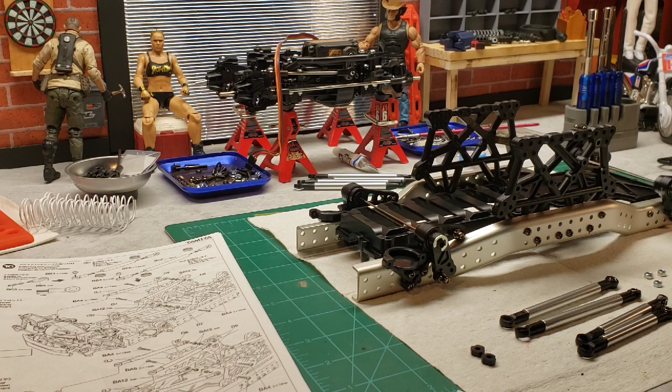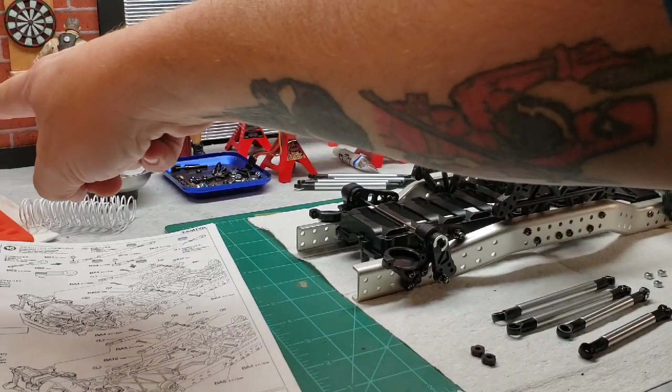I've gone ahead and assembled the arms for the next step, cutting some of it out since it's already been such a long build. We're starting off with step 16, attaching the axle to the chassis. I've also already built the shocks - most people already know how to build shocks, so that's another thing we can get out of the way.

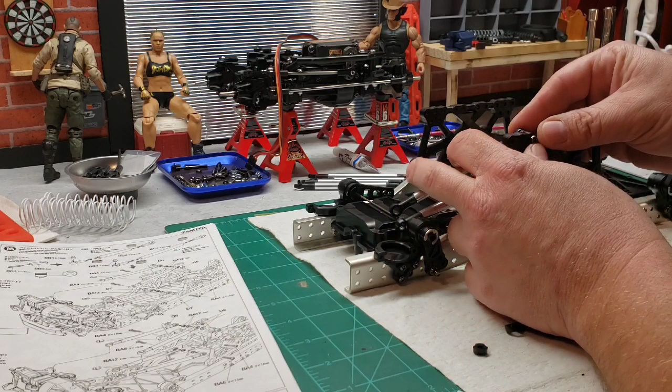We're going to start off with the short arms, which go through this hole right here, with a spacer and a lock nut. Then the long arms go down up here in this hole, and they get a spacer too. There we go, same on the other side.

Finally starting to get to the point of the build where it's going to start looking like a truck.

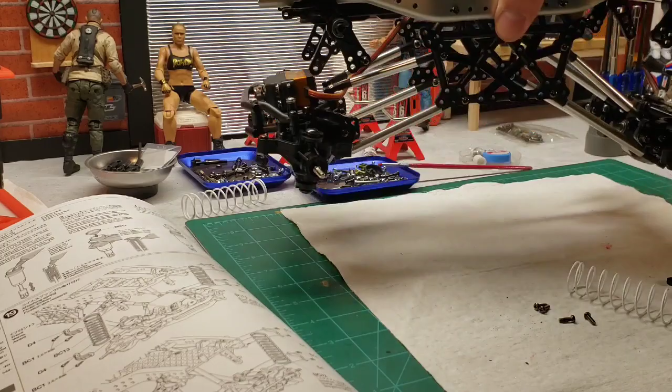Now we're starting to get somewhere - that is something else, all right. I'll go ahead and put the back together and we'll go from there. All right, I've completed that phase - we have the front and rear 4 links and axle set up.

Next is to start putting on the springs. It takes the blue hard springs for the front and the yellow softer, medium springs for the rear. I double checked this over and over because the way these springs line up is kind of strange - they've got quite a bend to them. But I went back over the steps, and everything's most certainly in the right screw hole, so all I can guess is that's the way it's supposed to be set up. We'll get these retainers around them.

We push the springs back in and hold them in place, and it just takes 2 screws. Hopefully my thumb's not blocking it too much on you - just didn't want that to go shooting out.

It's kind of an odd setup. If you have a rock crawler, you know what I'm talking about - this is a very strange setup. Normally you just have your shocks with springs on them, where this actually has this odd cantilever system that the shocks mount to, and then the spring system that runs independently from that.

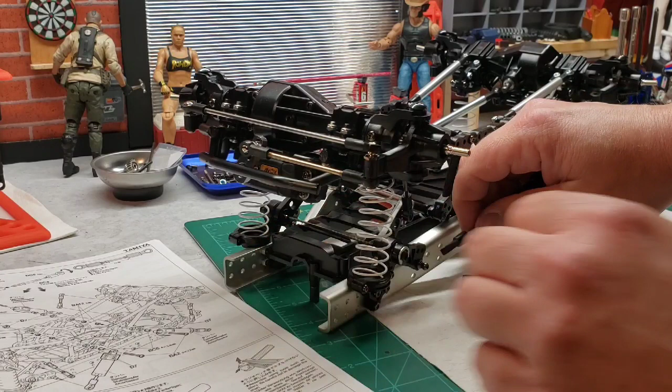Then you have to put one of these retainers in the back, screw through 2 spacers, and it is showing it on the front going to this spot. Then you got to try to get a lock nut in the back, and it's a pretty tight fit back there. Get it started, there we go.

And there it is. Now if that is not the strangest daggone suspension setup on a crawler that I have seen. But it appears that it does work, so I'm going to go ahead and get the rest of it put together, and we'll get back with you on that.

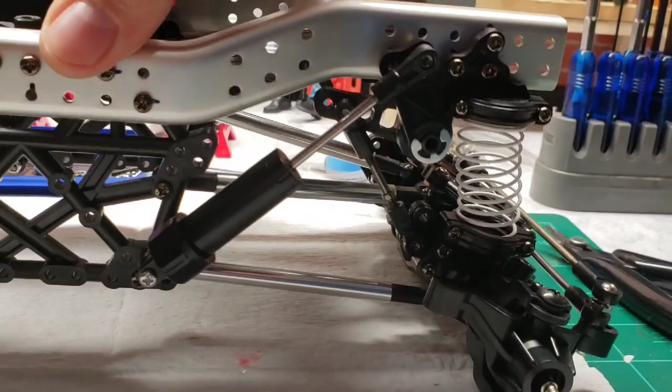Alright, we got the crazy suspension done. Look at that stuff work. That is a piece of engineering marvel right there - I've never seen a suspension quite like that.

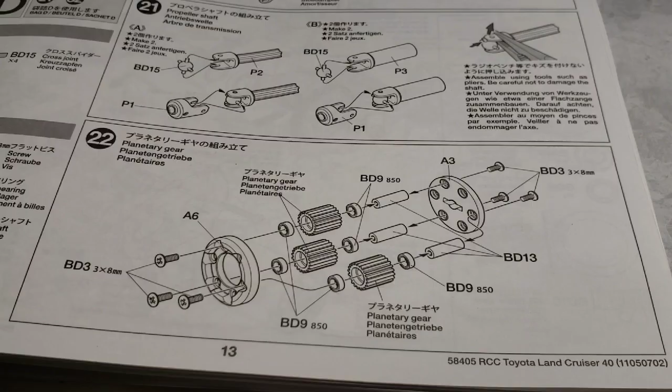But alright, now that we have that completed, we'll move on to the next step - starting to get the gearbox and drive shafts together. Let me get set up and we'll move on to that.

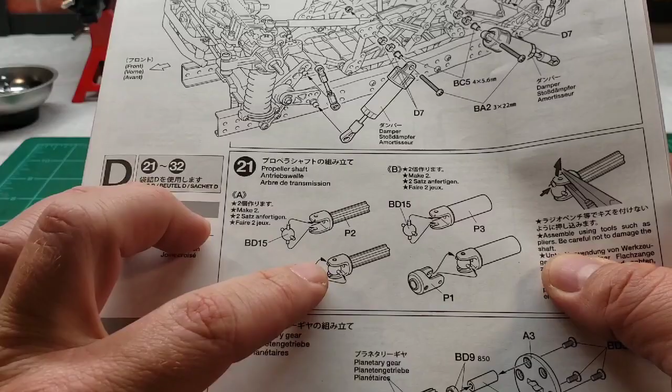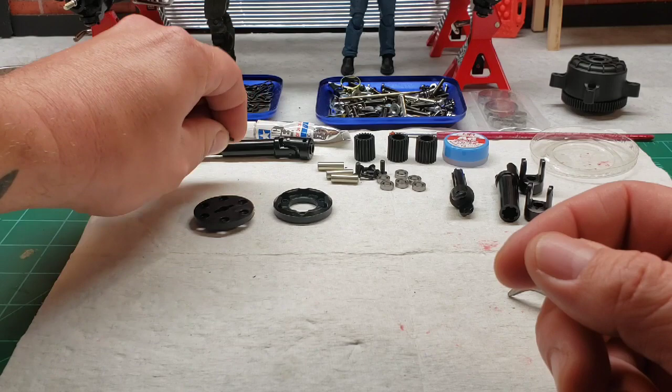Alright, so on to part 21 is putting together the drive shaft universals. This is a part that I'll probably be upgrading in the future - I don't really like how these plastic ones go together.

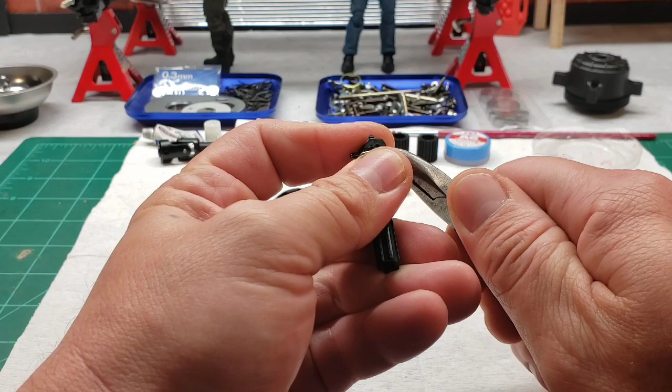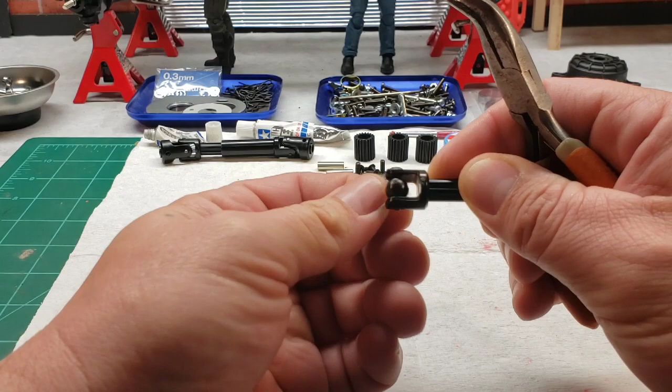Just, I don't know, it feels like a fail point to me. You have to kind of shove them down in there and then use a pair of pliers and bend this tab up to get them to pop into place. That just seems like a part that could easily come back apart under a lot of stress, in my opinion. But we're going to put them together and use them for now. I know they have the full metal ones available.

Yeah, there are some tricky little things. The hard part's getting the one side started. Push down there as best you can.

All right, there you go on that. I'll go ahead and assemble the other side of this. When it's all together, here's what they end up looking like.

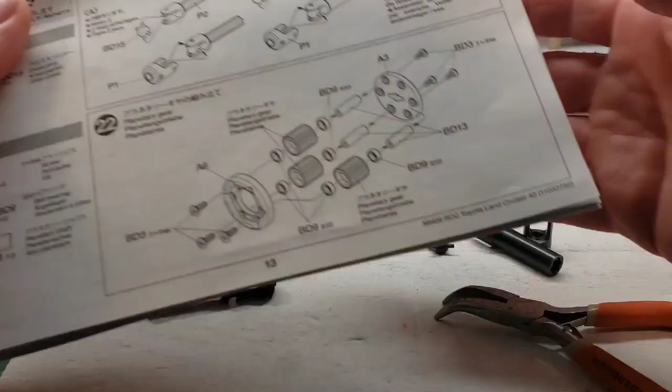Now we'll be moving on to step 22, the planetary gears. All right, it's time to start assembling this, the planetary gear section.

Now it has these screws going into these little aluminum lugs, and it doesn't tell you to thread lock them in the instructions, but I just feel a little bit better if it has some on it. This is a part I don't want coming apart.

When you look at it, they start off with you set in this direction, and first one goes in right here. Now I'm gonna get the screw through there first.

Yeah, I definitely feel better having a little bit of thread lock on there, especially with it being inside the gearbox. You don't want to open that up if one of these little screws comes out. That's just not a good time.

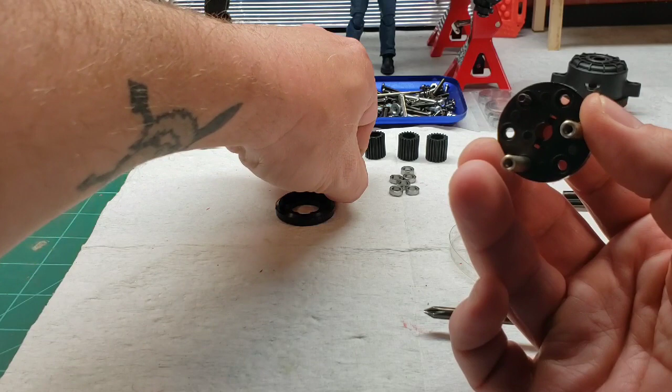All right, then these little bearings that pop in your planetary gears, they should just slide right over.

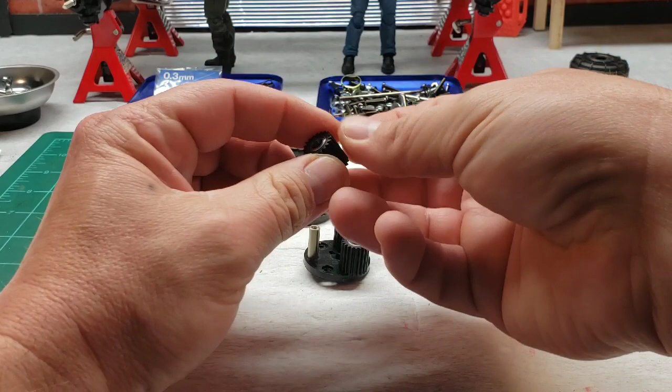And this should just line right up and sit over top of them.

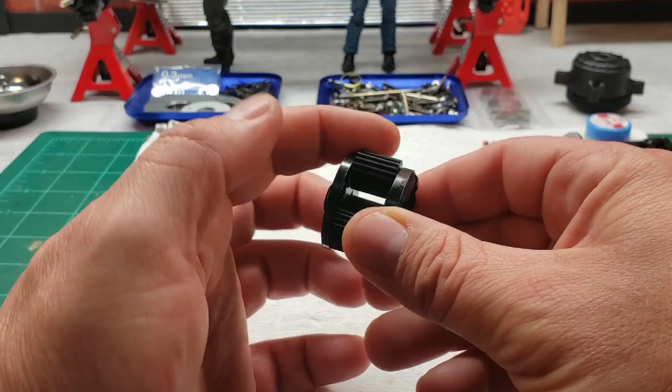Okay, well there we have it. Oops.

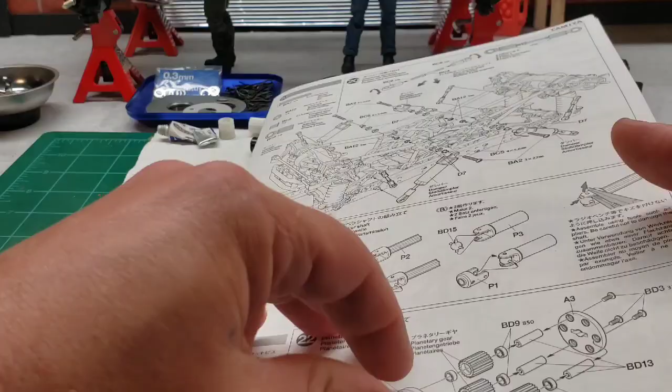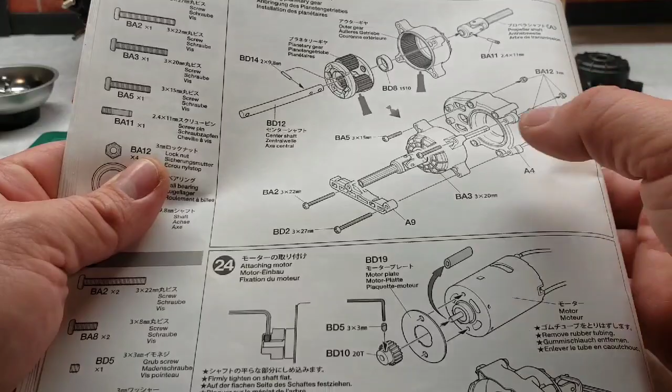Now, to move on to step 23, that's actually placing the planetary gears inside of the housing and start getting the actual differential and everything set up inside there. So let me get these parts out and set up and we'll move on to that.

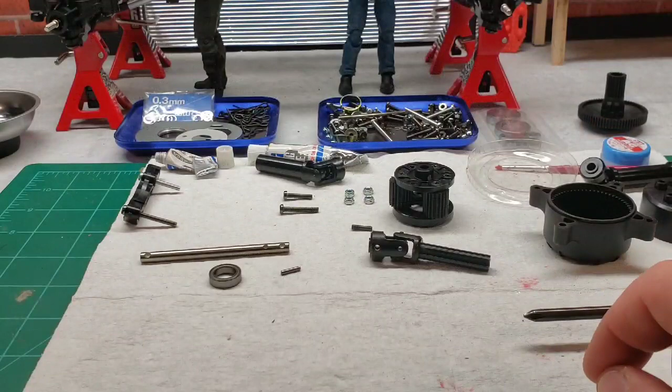Alright, I've stared at it for a second. I think I got a decent grasp of what's going on. I need to get these all greased up.

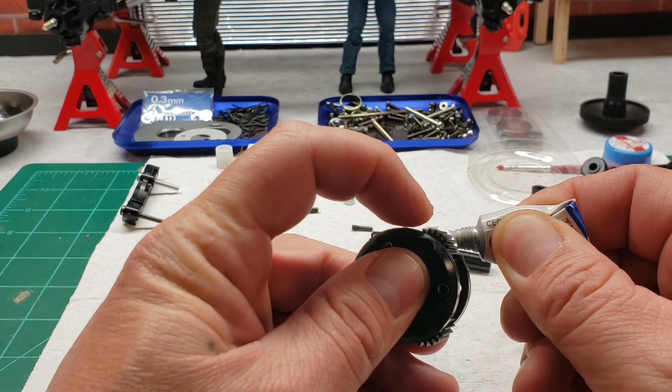I have to open up the next tube of grease here soon. This is one left over from another build, I figured I'd use up first.

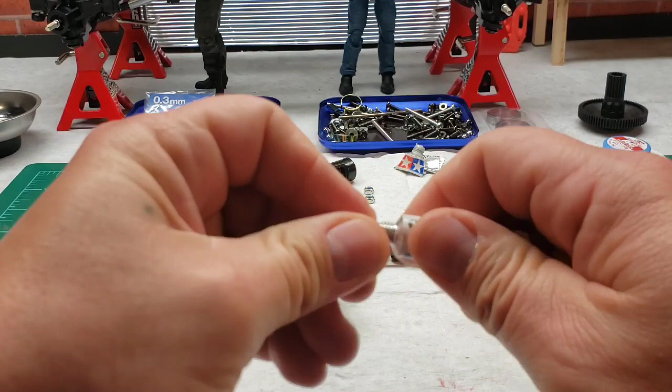Okay, now I need to take and grease this, set my little pin through there.

And that should set right down in there and seat. Good, it did.

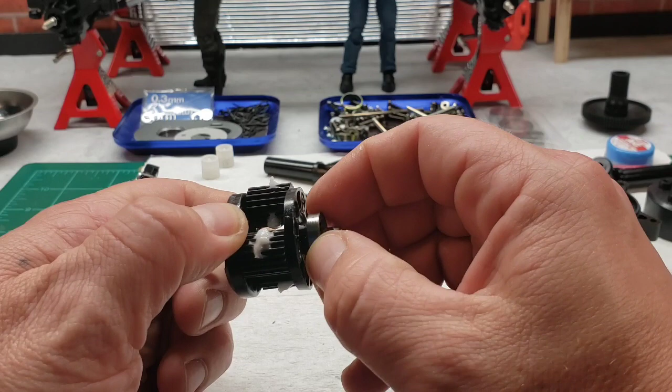And a bearing goes over here. That seats down in there nicely.

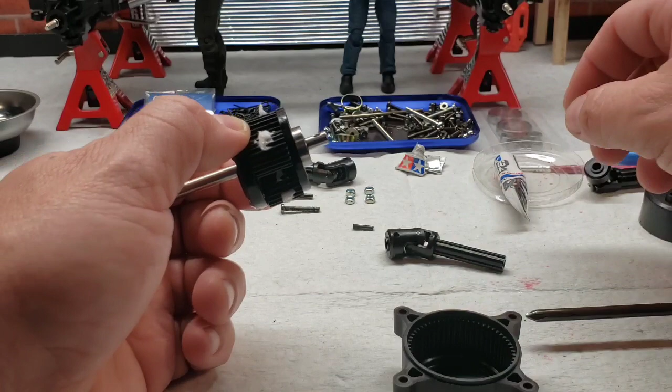I'm going to put a little extra grease around the inside of this before I install the ring gear, the pinion ring gear down in there, or planetaries, I guess.

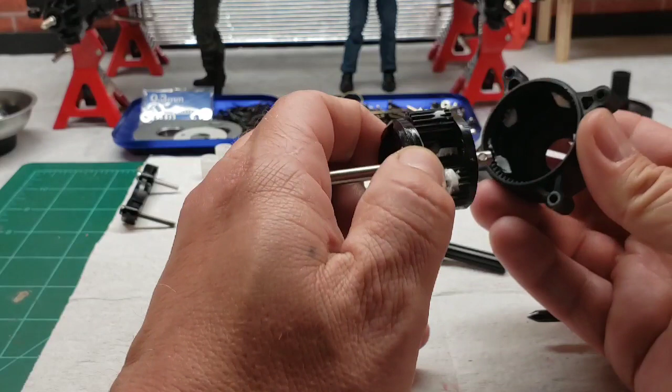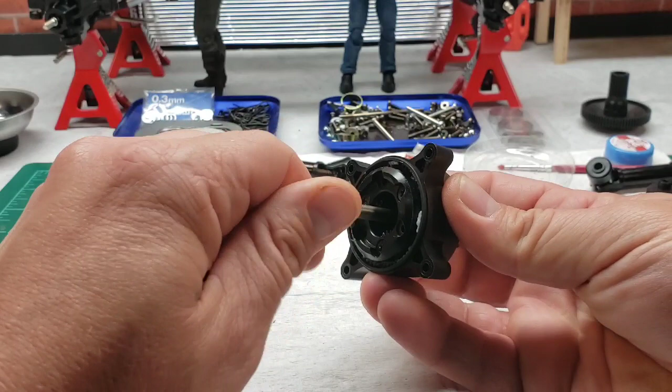That should slide through there, seat this way. Spins nice and smooth. And then should line up.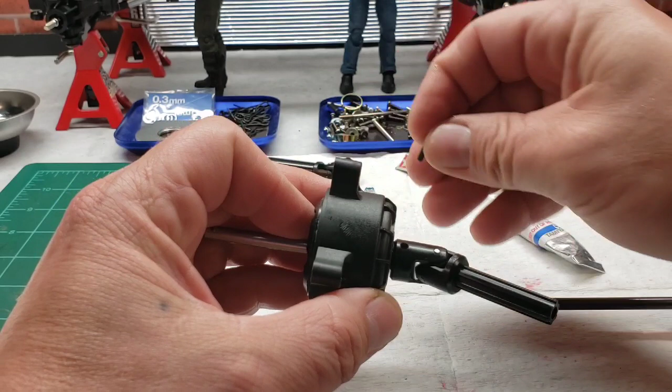A little pin that sits in there. That should decently lock everything into place. Pretty good.

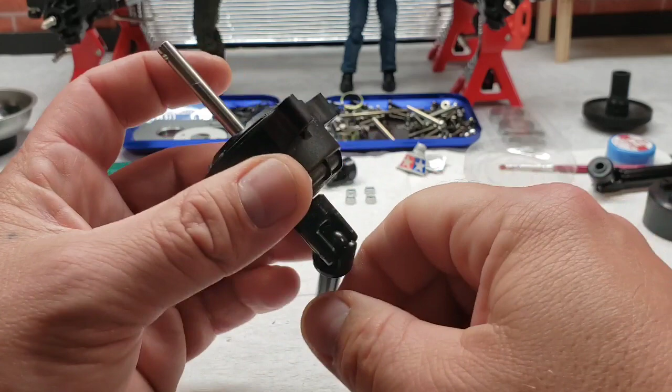After you've completed that, you have to get this to set in here. Spin it till it fits in.

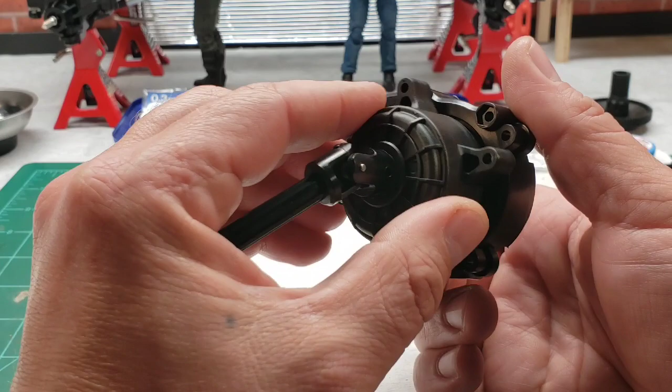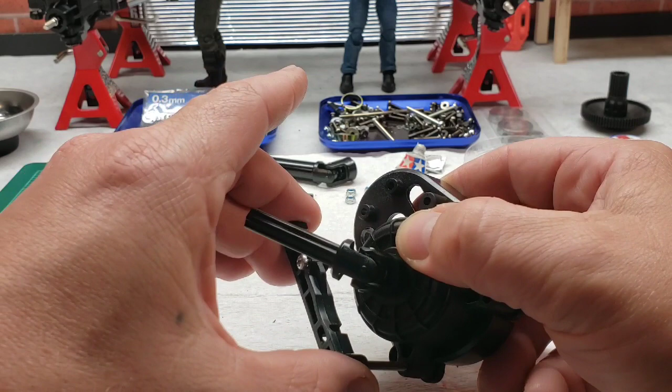That shows this, this is where it got interesting. I was looking at the instructions. There's 4 screws through this part of the assembly, and all 4 of them are different lengths.

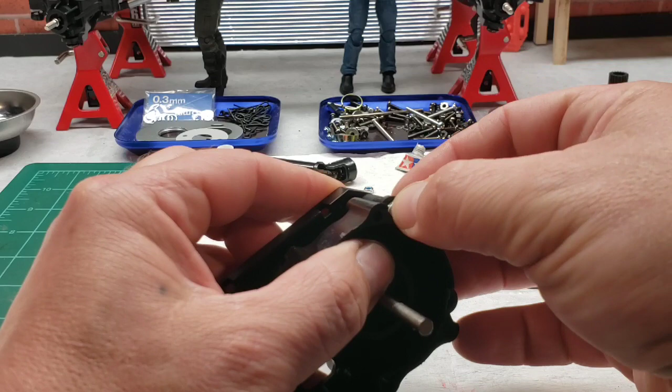Then you have to use a lock nut in there. Another one to fit down here.

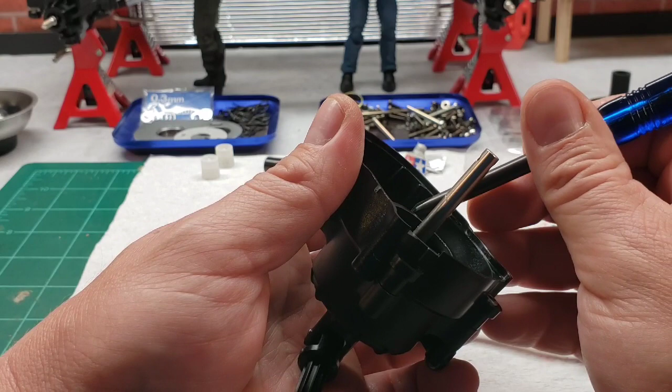There we go, I think I got it halfway straightened.

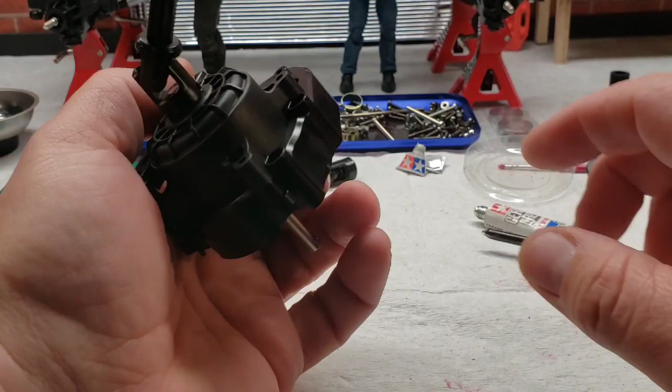Another one over here. Should take the shorter screw.

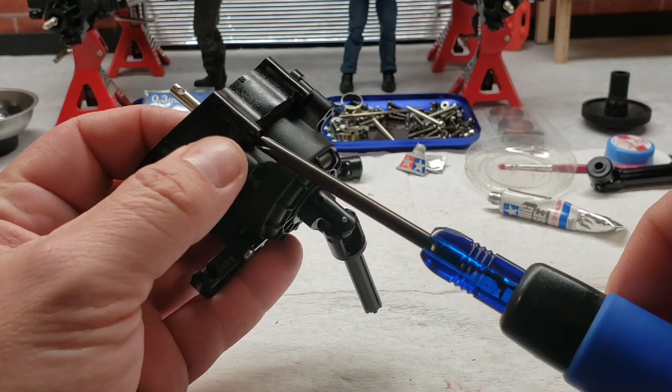Guess it'd help if I put it in the right spot. There we go.

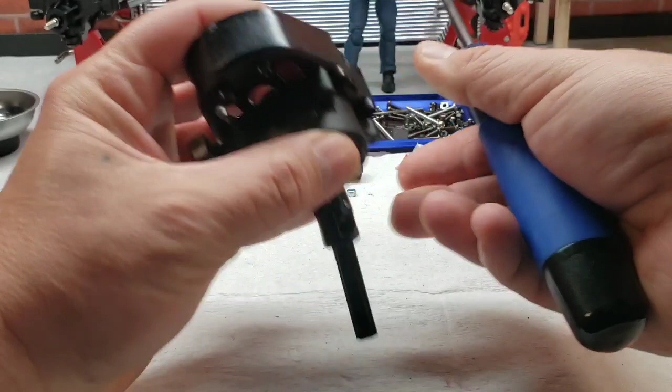Oh, I don't want to get seated in there. There it goes.

And the final one seats on this side. All right, like that. And it'll all be working properly.

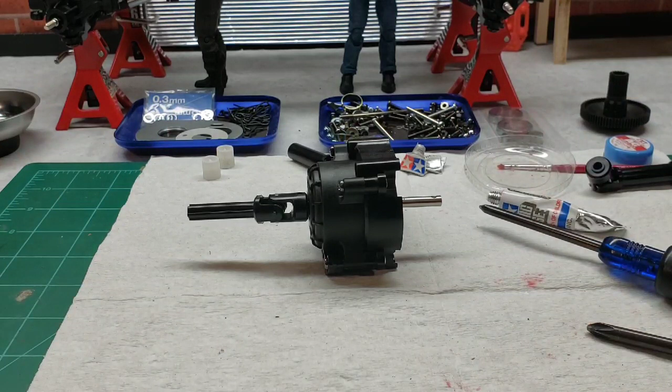Well, that finishes up step 23. I'll pan out here a little bit.

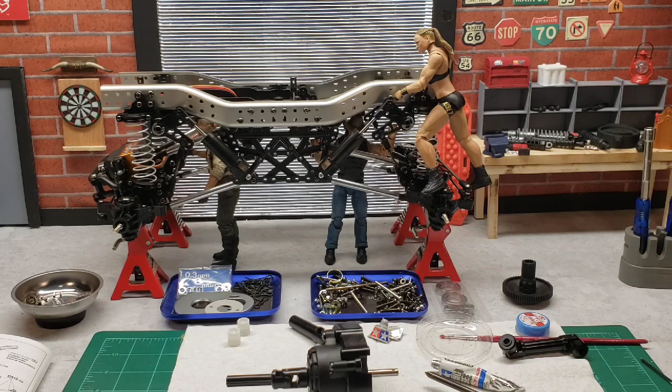We've gotten done everything on the frame as far as suspension wise is concerned, and we started assembling the gearbox. All the axles are mounted in place. I think that's what we're going to call the end of video 5 here.

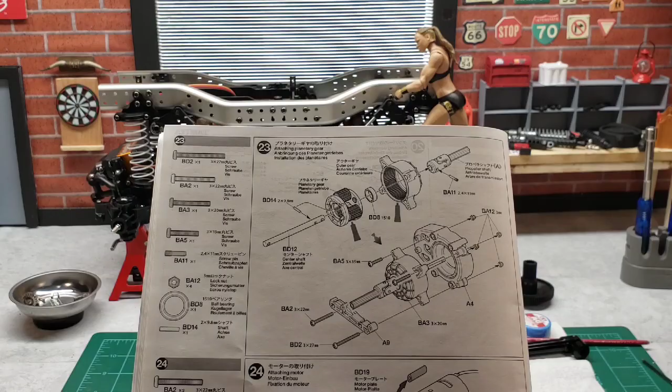When we come back, we'll be starting on step 24, and that'll be finishing mounting up the motor and actually start to get to the point where we're getting everything in and maybe get the electronics working in the next one.